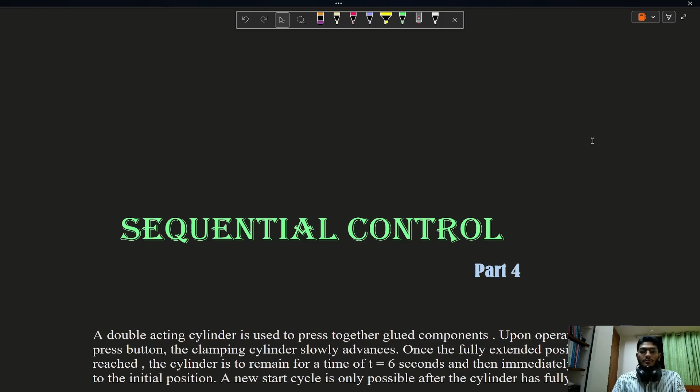Here I have a problem. The problem states that a double acting cylinder is used to press together glued components. Upon operation of a push button, the clamping cylinder slowly advances. Once the fully extended position is reached, the cylinder is to remain for a time of t equal to 6 seconds and then immediately retract to the initial position.

A new start cycle is only possible after the cylinder has fully retracted and after a delay of 5 seconds. During this delay, the finished part is manually removed and replaced with new parts for gluing. The retracting speed should be fast but adjustable.

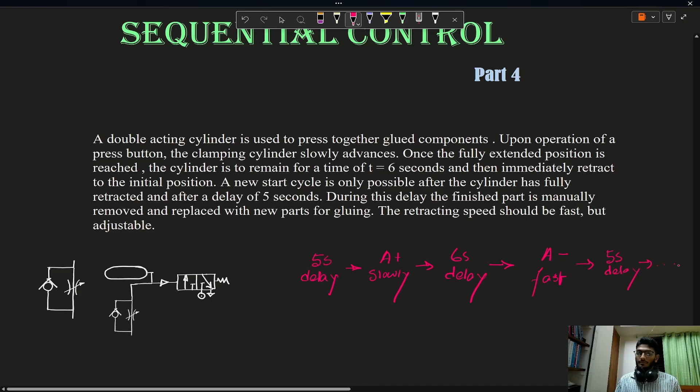First, the most crucial thing of this problem is to understand the sequence. What is happening? So when the operator initializes the sequence, what will happen? First, there will be a 5-second delay. Then A plus, slowly. Suppose the name of the cylinder is A. Then a 6-second delay. Then A minus, but fast. Then a 5-second delay, and so on. So this is the sequence.

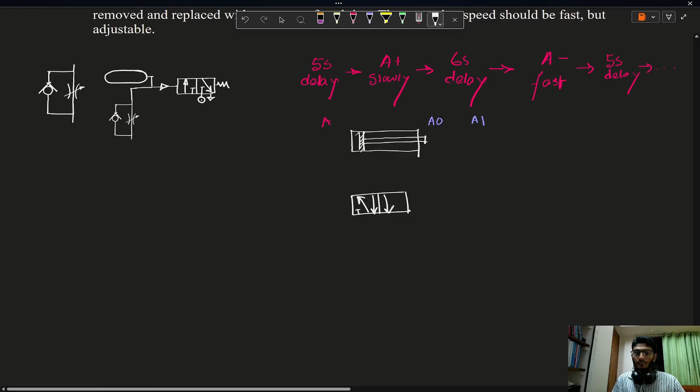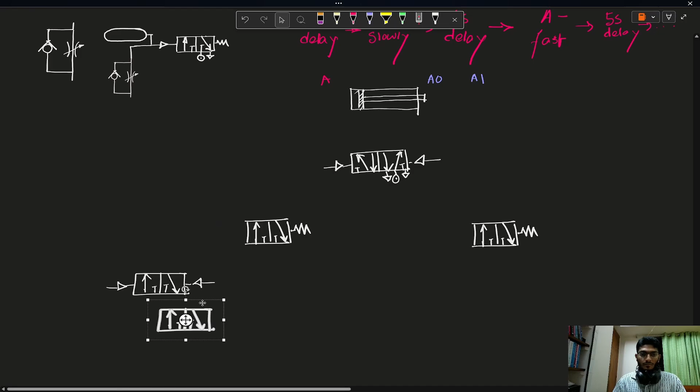So now let's draw the circuit. Here I have already drawn a throttle valve and a delay circuit. It will come in handy. First, a double acting cylinder. Now to control this double acting cylinder, I need a 5/2 DCV. Okay, to control this 5/2 DCV, I need a 3/2 DCV. Now I want to give the operator the freedom of initialization and termination of this sequence. Here, these 3/2 DCVs are for the operator.

Okay, let's go in sequence. When the operator pushes this button, a signal will go here, then a 5-second delay should be achieved. So I need a delay circuit. I will copy this. Okay, for this delay circuit, there will be a 5-second delay. Then A plus will go slowly. I need a throttle valve. I will just copy this. Okay, because of this, A plus will go slowly.

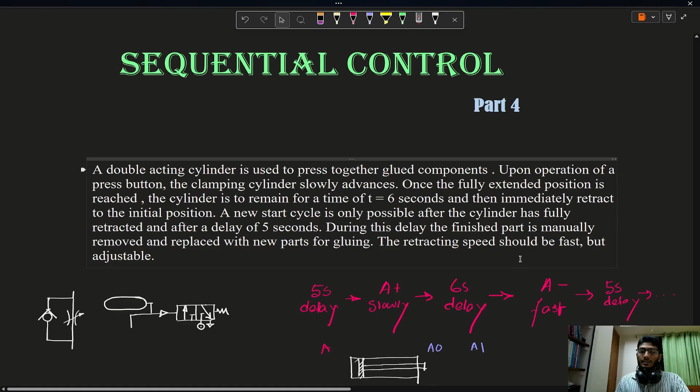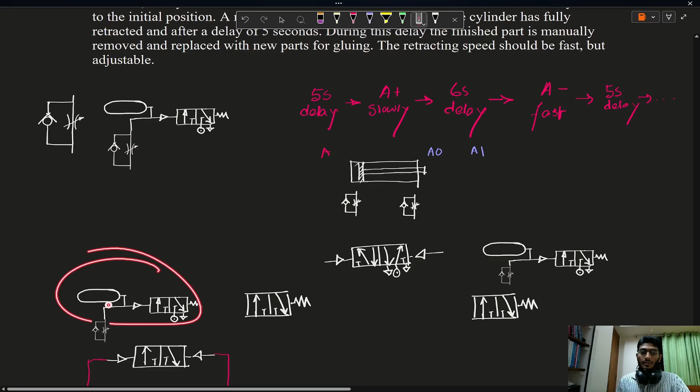Then there should be a 6-second delay. For that, I need another delay circuit. Let's copy this. Okay, then A minus will go fast. I particularly don't need a throttle valve, but it says that the retracting speed should be fast but adjustable. So we should add a throttle valve. And there is a 5-second delay again, and that delay will be for this delay circuit. Now let's connect this. Watch very carefully. But first I need to interchange this. This will make things easier. So watch.

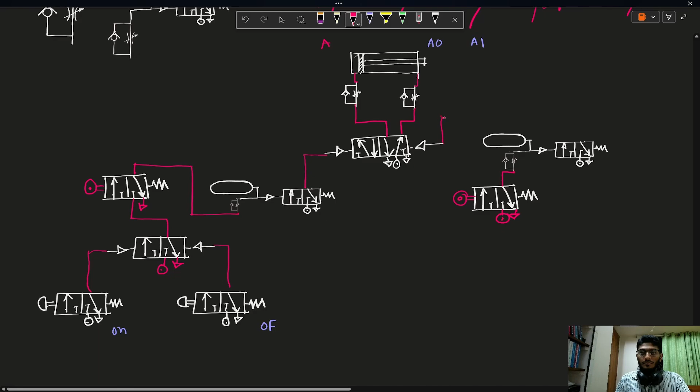So this is the circuit connection, and now let me break it down for you. First, the operator will push this button. It will initiate the circuit. How is that? This side will get actuated. A signal will go through here, then here, and this side will get actuated. And this side will remain actuated unless the operator presses the off button. Okay, another thing is that this is a lever plunger. So it needs to sense something. What does it sense? It will sense A0, because A0 is the initial position.

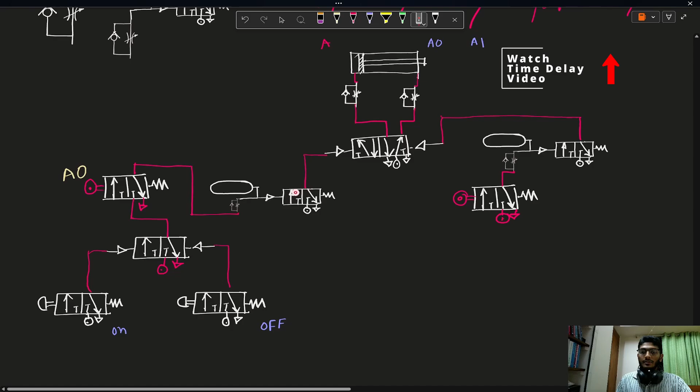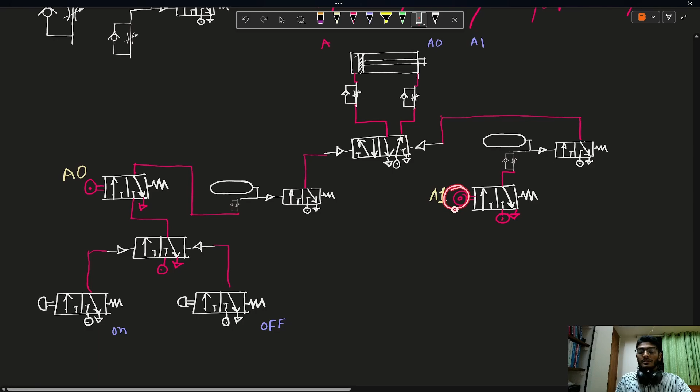After achieving A1, I need to go to A0. So this lever plunger will sense A1. Now when A1 initiates, this limit switch will sense A1. Then this side will get actuated. Flow will go through here and to this container. It will fill for 6 seconds. After 6 seconds, a signal will go through here and this side will get actuated. Then a flow will go through here. The right side of this 5/2 DCV will get actuated.

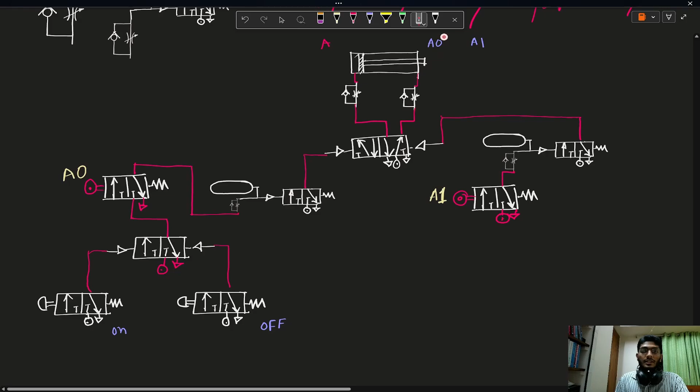A signal will go through here. At this intersection, this side is blocked, but this side is not blocked but restricted. So restricted flow will go through here, and A1 to A0 initiates. But this restriction is very little, so A1 to A0 happens really fast. Okay. And when A0 initiates, this limit switch will sense that, and the cycle continues. So this is the overall solution.

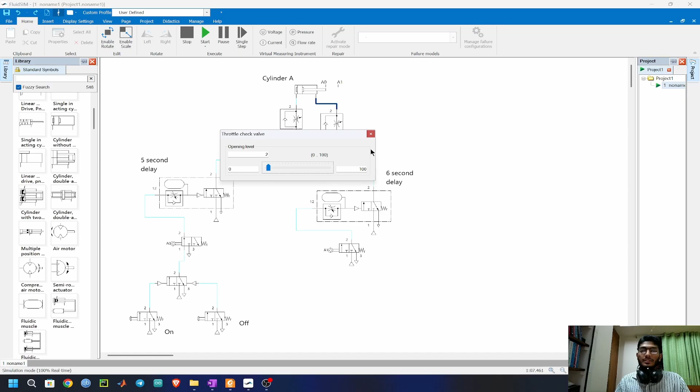Now let me show you in FluidSIM. This is the circuit. I did exactly what I explained. And now let me write something for better understanding. So I hope you understood the circuit earlier. This limit switch will sense A0, this limit switch will sense A1. And let me show you the restriction values. This 5-second delay circuit will have 1.5% free flow, and this 6-second delay circuit will have 1.3% free flow. This throttle valve will have 90% free flow because the retraction speed is very fast but adjustable. But this side will have 2% free flow because I need to extend the cylinder very slowly.

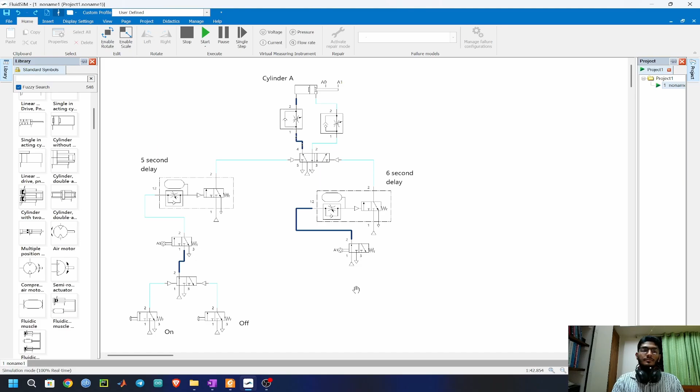Let's start the simulation. Pressing on. I hope you understood what is happening. This is an automatic sequence. So when the operator pushes the on button, the cycle will go into a loop unless the operator pushes the off button. So that's all. This is the solution of our problem.